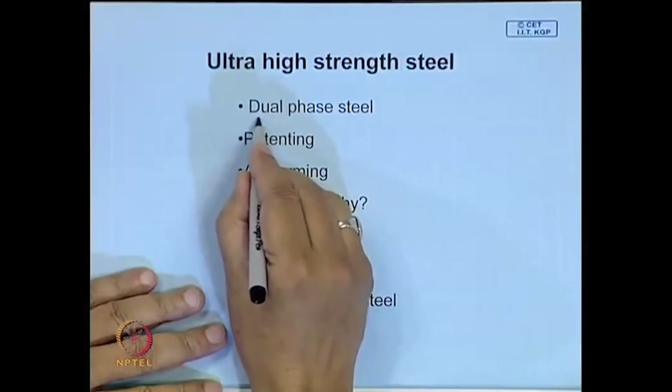We will talk about dual phase steel, we will talk about a special process called patenting, we will talk about ausforming, and in many of these cases it is possible to attain a very high level of strength even in plain carbon steel. Now, the question then comes up, why do we then go for alloy steel and unnecessarily increase the cost, because most of the alloy additions which are made are quite expensive. We will know why we go for alloy steel.

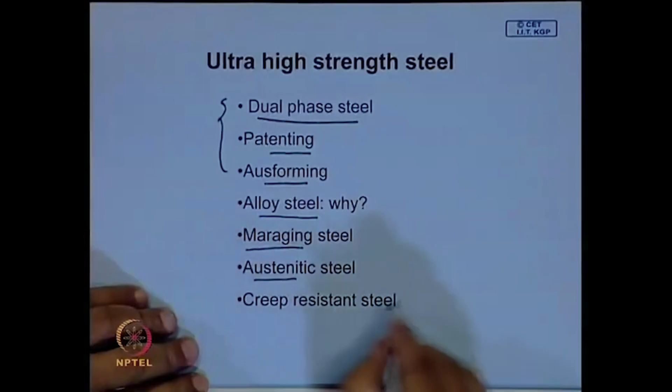We will talk about two different classes of alloy steels which have very high strength and some very interesting properties. We will talk about Maraging steel, and austenitic stainless steel. Primarily we will talk about its stainless property, and also we will know how our understanding of the principles of physical metallurgy has made it possible to develop the type of steels, creep resistant steel, which are being used in several high temperature components.

Now, let us talk about this dual phase steel. In a dual phase steel, what we do is a normal heat treatment process. We heat, suppose this is the composition of steel, this is the part of the iron carbon diagram, this is austenite, this is the ferrite plus cementite region. So the normal structure is something like this.

Of this particular composition, you will have pearlitic regions and you will have ferrites, these are ferrite grains. So it is made up of two distinct regions: these are the primary ferrite and this is pearlite.

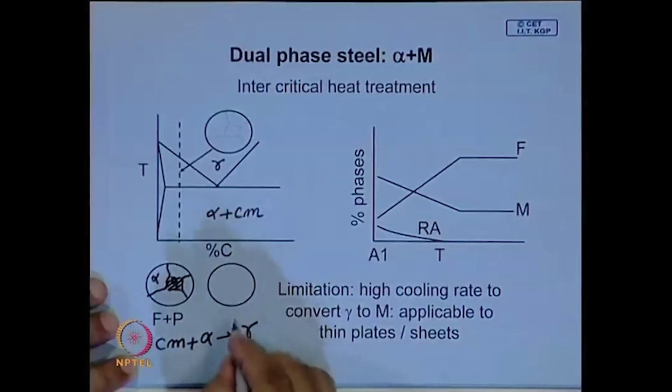Now, when you heat it above this temperature, what happens? The pearlite, the cementite dissolves in the neighboring ferrite, reacts with it, and gives you austenite. This reaction takes place at these interfaces, and gradually the entire pearlite is converted into austenite.

So what you have now here will be alpha, that means ferrite plus austenite. So it is a duplex structure. You can also see the composition: this point will be giving the composition of ferrite, and this point will give you the composition of austenite.

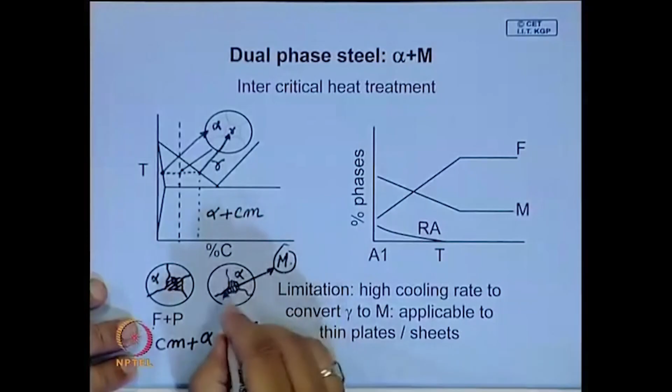Now, what will happen? Suppose you quench from here, then the ferrite parts will remain unchanged, but the austenite part will convert into martensite, and then instead of a ferrite pearlite structure, you will get ferrite martensite. This martensite, since its carbon content is high, will have very high hardness. So you have a composite material sort of thing, a duplex structure.

This is the advantage of this intercritical heat treatment, and it can be implemented in mass production as well. Depending on the temperature at which this intercritical heat treatment is given, you will have different amounts of martensite. If you go higher, beyond this point, ferrite will be almost zero. So beyond this, it will be totally austenite, and if you quench, part of it will convert into martensite and part will form ferrite.

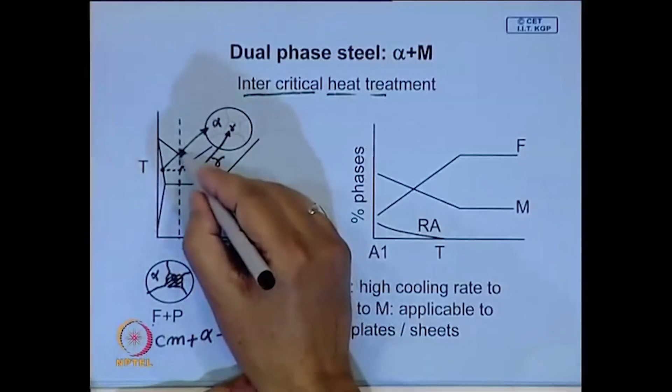So if you quench directly from here, because it is a low carbon steel with low hardenability, even if you quench it very fast, you may not get a completely martensitic structure. So this is the critical point, this is A3. So if you go above A3, then there is not much change.

You have a very small amount of martensite, and it may have mostly ferrite. This is the percentage phase. Whereas, if your intercritical heat treatment is given here, then you are likely to have somewhere here that amount of austenite, proportional to this region, this line.

Amount of ferrite is this, but this martensite amount will be that equilibrium amount, and as you go up, that amount of martensite will change. Also, this martensite will have a much higher carbon content, so its MS temperature is likely to be lower, and MF will certainly be lower than room temperature.

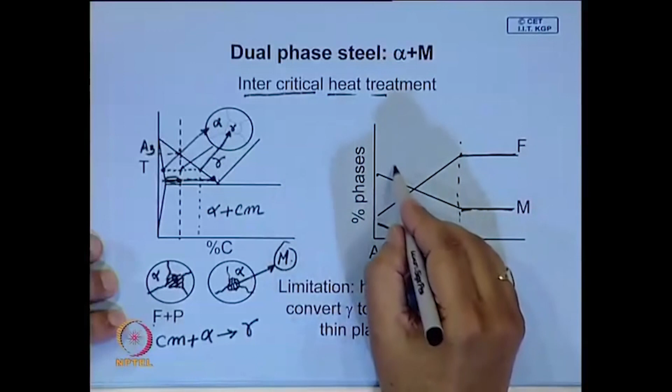So, even if you quench, you are likely to get some amount of retained austenite, and this will go on decreasing. So your total structure, if this is the intercritical heat treatment temperature, will consist of ferrite, martensite plus retained austenite, and as you increase the temperature, the amount of retained austenite goes on decreasing, and here you will get ferrite and martensite.

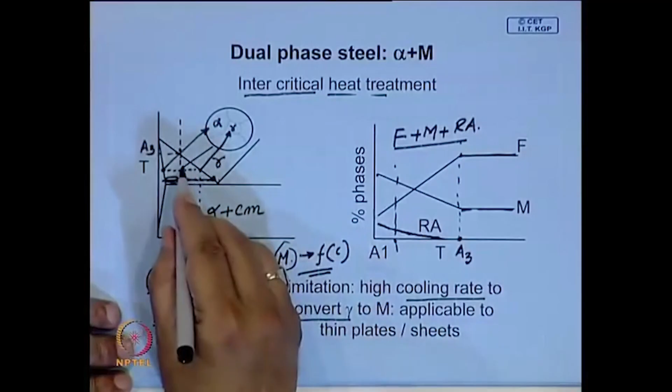But the advantage of having a duplex structure somewhere in between is there is a possibility you will get a stronger martensite, because strength of martensite is a function of carbon content. So it is likely to have much higher strength, but the limitation of this dual phase is the high cooling rate required to convert that austenite to martensite in plain carbon steel, and it is applicable to thin plates and sheets. So the size limitation stays.

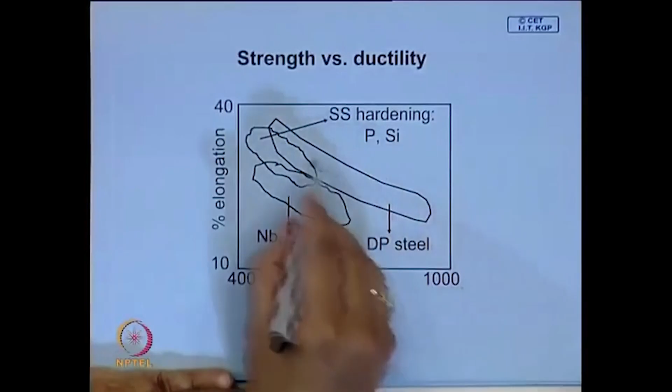Now, what is most attractive about dual phase steel is this gives a better combination of strength and toughness, because in many applications strength may not be enough, it must have a very high degree of ductility. Look at this region which is the dual phase steel, and how does it compare with conventional steel?

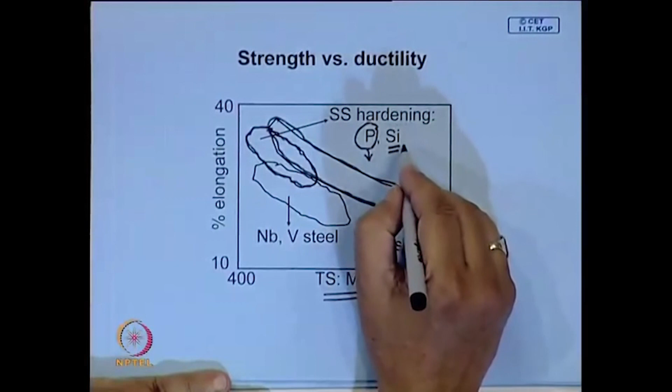Conventional steel's main strengthening mechanism is solid solution strengthening, and phosphorus, as a solid solution strengthener, has a very high degree of effectiveness - a little phosphorus can significantly increase the strength, but it segregates and makes the steel brittle, so these are the problems. Silicon is a common solid solution strengthener. Manganese also improves strength, but it is not as strong as phosphorus or silicon.

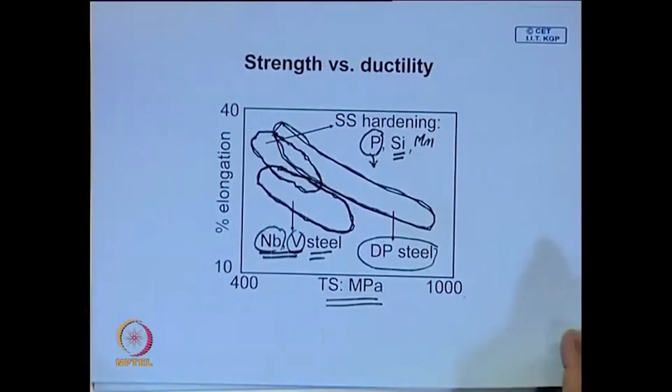Grain refining is the key strengthening mechanism in case of microalloyed steels, so grain refinement we looked at it critically - niobium and vanadium carbides and nitrides are the key constituents which inhibit austenitic grain growth, and you get a very fine structure. So, compared to all this, dual phase steel has a better combination of strength and toughness, and it also has good formability. That is why there is a special attraction for dual phase steel.

Next, let us consider a special heat treatment process called patenting. This is an isothermal heat treatment process, and it gives very high strength steel wire. This is used to produce high strength steel wire.

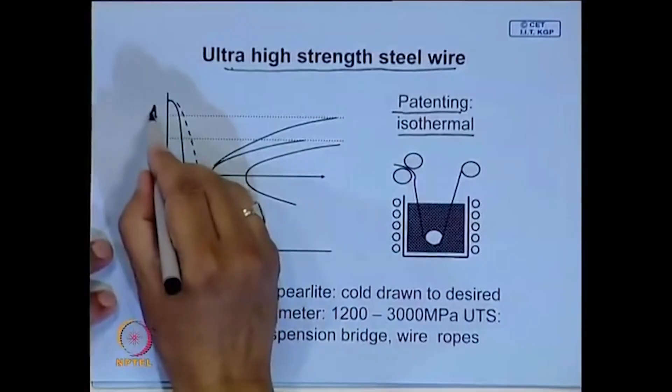If we look at the time temperature transformation diagram of steel, this is the A3 temperature, this is A1, and here you have ferrite plus austenite, this side is austenite. What we tend to do is cool the steel from above, from the austenitic region. When it is austenite, you cool it almost to the nose here.

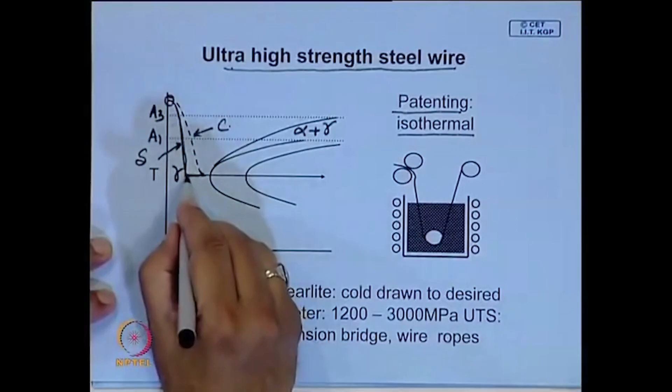This is the temperature of the surface which will cool fast, this will cool slowly, and this is surface, this is the core, and you maintain it in a bath, a liquid bath consisting mostly of lead. If you have a liquid metal bath, this allows the temperature to become uniform and allows transformation to complete at the same temperature, and what we are trying to get is fine pearlite.

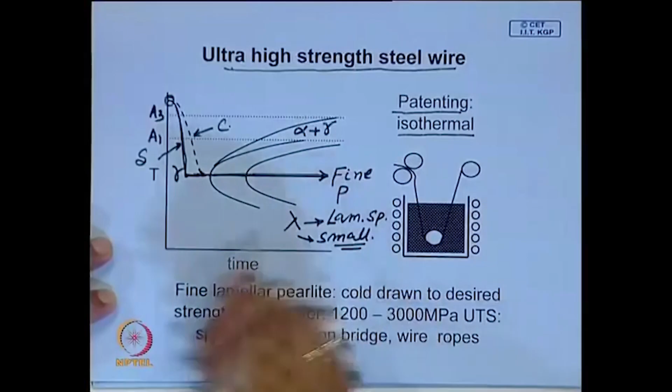Fine pearlite means the lamellar spacing, lambda, is very small, and under an optical microscope the pearlite will not resolve. In normal pearlite you do see this kind of lamellar structure, but the main idea is if you look at it in a standard optical microscope, you will find that most of these pearlite nodules are not resolvable. And how is it done?

So, these are some guide rolls, and this is an idle guide. This is a lead bath, molten lead, and this passes through here.

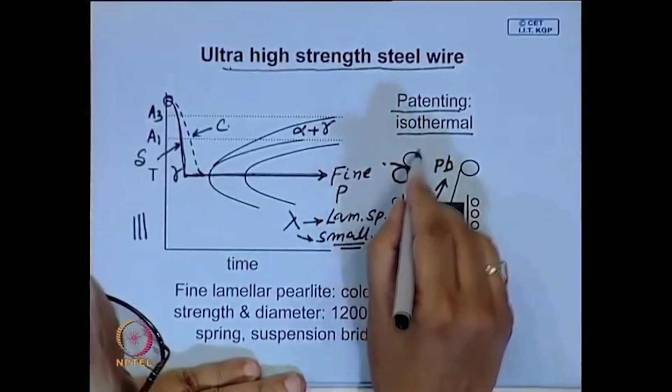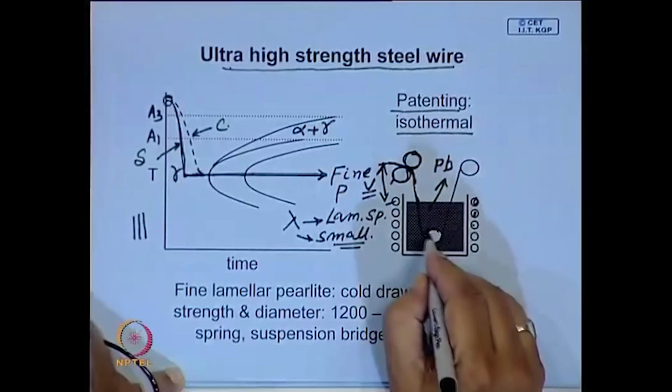You may straighten this in a roll, and sometimes you can heat it also. You can apply some voltage between this and this, and this is a lead bath, and these are heating coils. This can be set up easily in the laboratory, and you can apply some voltage, and then the wire gets heated up, and this temperature is above A3. It comes into the lead bath, and this is just a guide idle roll, and this wire comes out and it coils here.

By this treatment it is possible to get extremely fine lamellar pearlite, and they have excellent drawing property that they can be cold drawn to desired strength and diameter, and you can get a strength of the order of GPa, gigapascal strength. These are used for very high strength applications like springs, suspension bridges, high tensile wire ropes, and strength will increase definitely as the percentage carbon goes up.

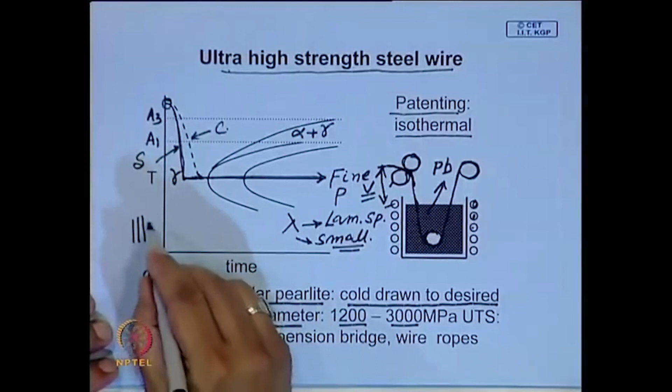In fact, this lamellar structure, when you give such high cold working, say maybe 90% cold work, these lamellar spacings become even smaller. With the transmission electron microscope, people have seen they come out to be of nanoscale dimensions, the spacings, as a result of such large deformations, and that is responsible for such a high level of strength.

Now, let us look at another special forming process called ausforming.

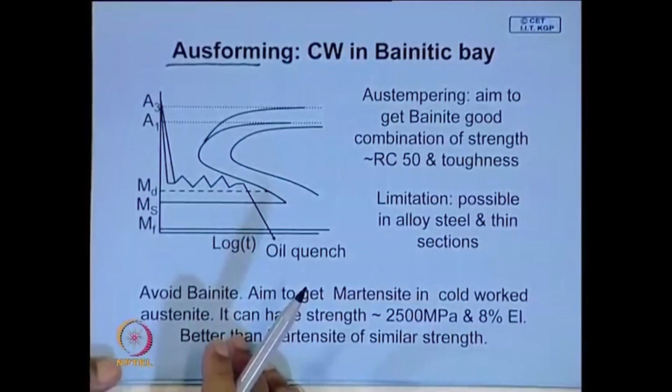In microalloyed steel, what we found out is if you work austenite at a lower temperature, that austenite will not recrystallize, and these austenite grains, if you deform in one direction, these grains become highly elongated. So at least in this one direction they become extremely small dimensions, and they do not recrystallize.

So they will also have high dislocation density. So rho will be high, dislocation density is high.

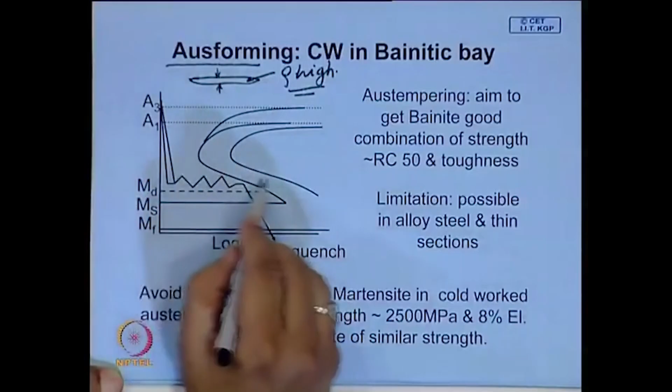Now, if you cool austenite to a region, we have seen most steels have a bainitic bay. If you are able to cool at this temperature - this is the core temperature and this is the surface temperature - when you cool here and then you give working at this region, and here your hold time is sufficiently long, but you make sure you do not go too close to Ms. So in fact, this working has to be done at a temperature higher than the MD temperature. This means that if you work, then the martensitic start temperature goes up - this is the martensitic temperature for a certain percentage of deformation.

So do this: give cold working above MD, and after the cold working is over and before bainite starts forming, you quench the steel. After this, it is necessary to give some tempering, maybe at 100 degrees centigrade, to relieve internal stresses. But the key thing is you avoid bainite and you get martensite in cold worked austenite.

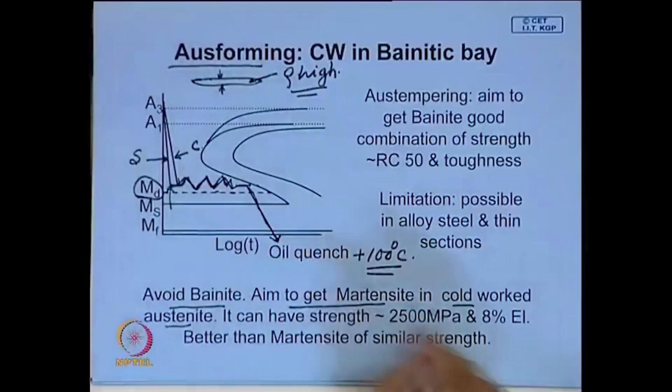So austenite is also very hard, and within that you also get finer, much finer martensite, and this dislocation density will be much higher. Here you can attain a strength level that is quite high, yet you will have sufficient ductility, which is not possible in martensite of similar strength.

We will see that although this type of heat treatment can be given in plain carbon steel, often it is not so easy to do so because of section size limitation. But if you go for alloy steel, possibly you can go to a higher... in alloy steel, possibly that section size limitation may not be that critical, and we will look into that.

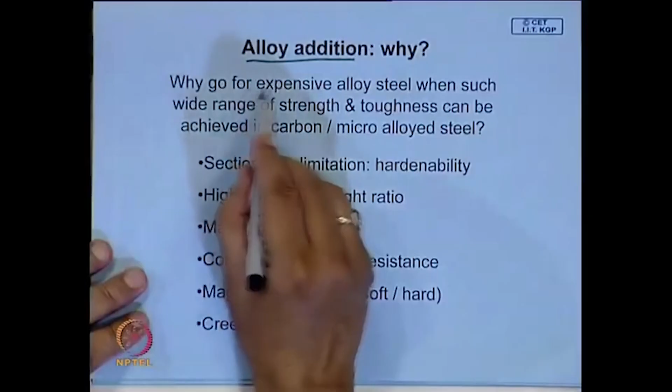Now let us look at why we need alloy addition. The question is, why go for such expensive alloy additions when such a wide range of strength and toughness can be achieved in carbon and microalloyed steel? Is it really necessary? Because alloy additions always make steel expensive.

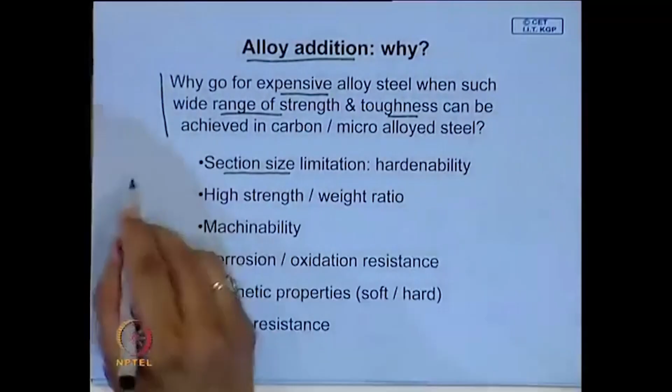Now the major limitation is that plain carbon steel has poor hardenability, and you have section size limitation. Say plain carbon steel, even in the case of infinite quenching - extremely high rate of quenching, ideal quenching - you may be able to get through-thickness hardness, that means 50% martensite at the core, up to, let us say, depending on carbon content, maybe up to 10 millimeters. So for many applications this is too small.

Say, suppose one application that comes to my mind right now is the landing gear of an aircraft. This is a part of the aircraft, it has to fly. So obviously your aim will be to use very high strength material, so that the strength to weight ratio is high, so that the structure is light and it can fly. And in this case, this dimension may be of the order of 80 millimeter diameter.

So imagine, it will be impossible. We know that the best property you can get in steel is through hardening and tempering - tempered martensite gives you the best combination of strength and toughness, and this steel must have high strength as well as toughness. So there is no way you can achieve this for such a large size.

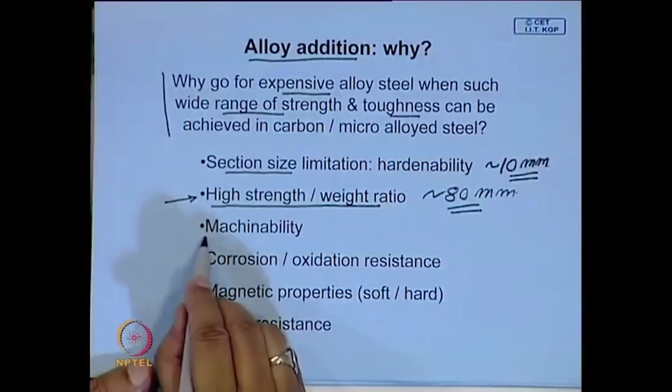So here alloy addition becomes a must. Sometimes to get certain very specific properties, many applications like nuts and bolts require machining, so the material should be machinable. For normal steels, machinability can be improved significantly not only by heat treatment - if you have globular cementite, machinability is higher - but most bulk steels which go for nuts and bolts may not have a high amount of carbide.

So there, machinability is improved by adding some inclusions. Particularly, to take care of sulfur we add manganese and form manganese sulphide inclusions. In fact, for machinable steel, sulfur is intentionally added along with a little more manganese to take care of it, and the presence of these manganese sulphide inclusions gives the steel good machinable property. So this means not only hardenability limitations, but also to give certain very specific properties you need to add some alloy elements.

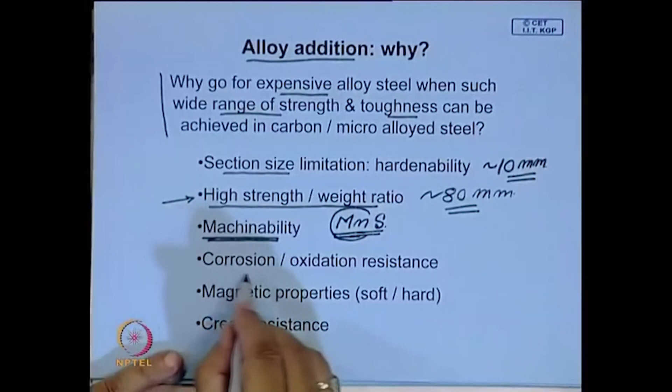Another important property is corrosion and oxidation resistance. Steel rusts. To protect it from rusting, we use many other techniques as well, like coatings - you galvanize the steel to protect it. For most sheet applications, you galvanize steel to protect it from rusting, but in many cases this may not work, so you may need to improve its corrosion resistance. To improve corrosion resistance, you add certain alloying elements, and one of the most common is chromium.

If chromium is present in dissolved form greater than around 12%, say 12.7% to be specific - if it is more than 12% chromium - then the steel has a thin protective coating of oxide which makes the steel stainless. So all stainless steel will have a minimum of 12% chromium, and this chromium must be present in solid solution.

Similarly, for magnetic properties - many applications use steel for its magnetic property. It is magnetic below the Curie temperature, and one of the main applications is the transformer core. When it converts voltage from low to high or high to low, the transformer core gets heated, and this is known as hysteresis loss.

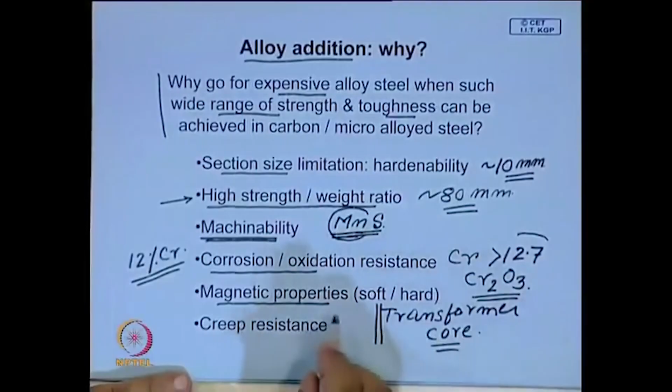To cut down the hysteresis loss, often in steel we use some special alloy elements, particularly silicon. Some steels also add phosphorus - these are electrical grade steels. So you need to get certain specific properties. Similarly, to get hard magnetic property - the transformer core is a soft magnetic material - for hard magnetic property, other special elements need to be added. So this means alloy additions are necessary to improve certain specific properties.

Another major application of steel is in power plants - steam power plants, boilers - where the steel has to be used at temperatures above, say, 450 degree centigrade. In this case, creep becomes one of the important failure mechanisms. So in this particular case also, you need some alloy addition which gives it better corrosion resistance and better creep resistance.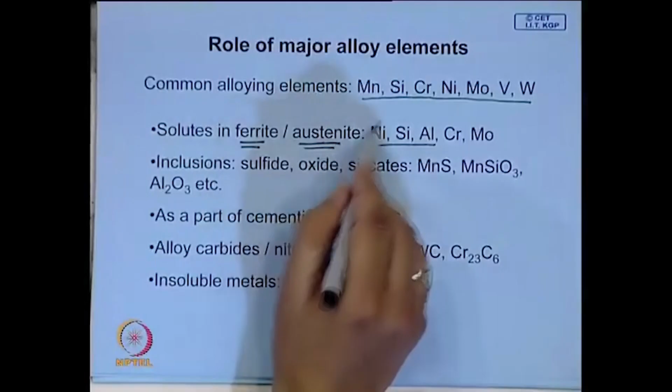Now, when you add alloy elements to steel, where does it go and what is the role that they play? I think this will vary from element to element. Here are some common elements present in steel - this list is by no means comprehensive, there can be several others also possible, but these are the major alloy elements. Bulk of the steel that we use is ferritic steel, and many of these alloy elements are soluble, even if to a limited extent, in ferrite, and in the high temperature phase austenite they also have some degree of solubility.

They will be present as solutes, substitutional solute elements in ferrite and austenite. Some of the elements you add react with impurities present during the steel-making stage. There will be oxygen, it reacts with oxygen to form oxide. There will be some sulfur, it reacts with that sulfur and converts into sulfide, and silicon is also present in steel, some form silicates.

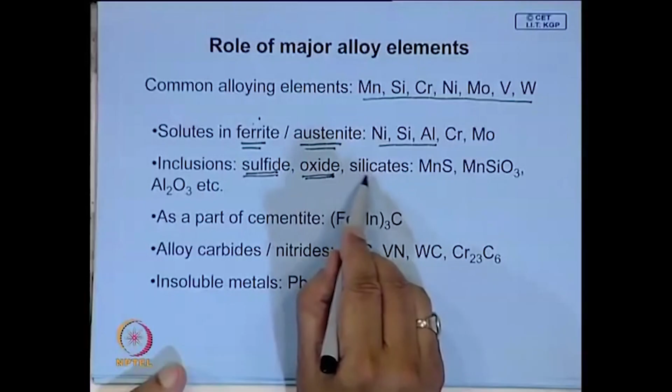Some examples are manganese sulfide, manganese silicate, iron silicate. These are possibilities, you can also have oxides. Aluminum we have seen is used as a deoxidizing agent and it gives fine grain steel.

Alumina is also an inclusion, and some of these inclusions deform easily during hot rolling. Elements like manganese sulfide, if present, get elongated, and presence of these elongated inclusions makes the property directional. Suppose there is an inclusion like this, in the transverse direction it will have lower strength. It will not affect strength along the longitudinal direction, but transverse properties, particularly ductility, get affected. They are also difficult to weld because of these inclusions, they give rise to a defect commonly known as lamellar tearing.

So inclusion control becomes necessary. Shape and size of inclusion control is key to improve properties like weldability or transverse strength, whereas these hard particles are present as globules.

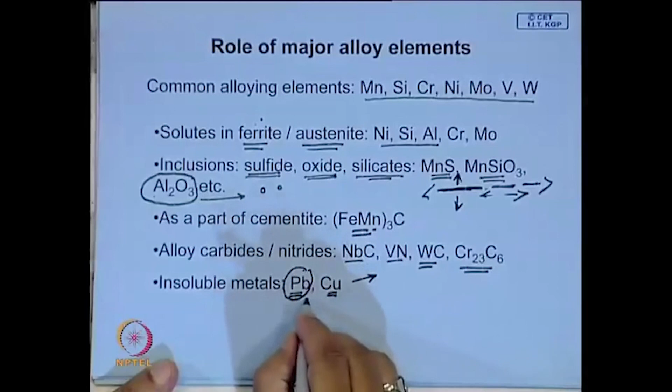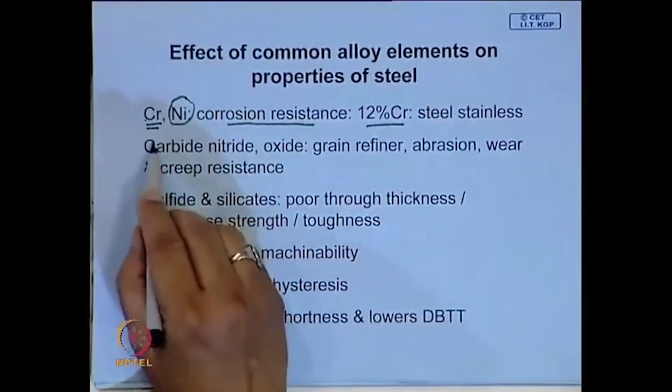Now carbides, nitrides and oxides act as grain refiners. If you have tungsten carbide, that will add to abrasion and wear resistance. Some carbides like chromium carbide or particularly MOC, molybdenum carbide, add to creep resistance. These precipitates, if they form along grain boundaries, actually inhibit grain boundary sliding and improve strength.

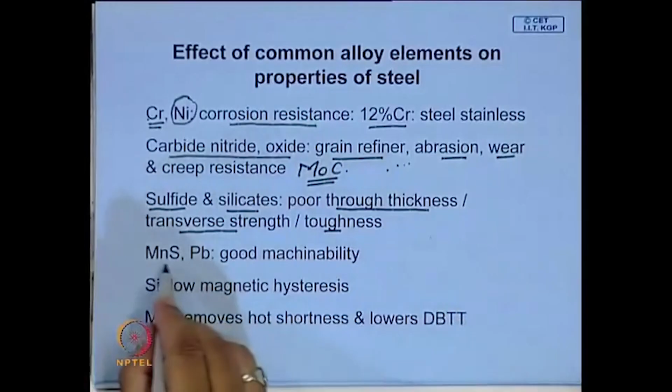Similarly, if you have sulphide or silicates, they give poor through-thickness properties or transverse strength and toughness. It also gives problems with weldability. These inclusions we mentioned give good machinability. Silicon gives low magnetic hysteresis. Addition of manganese removes hot shortness.

We did talk about it, the problem related to sulfur content in steel. Sulfur segregates to grain boundary, and if manganese is not there, it will form with iron a low melting sulphide eutectic, which gives steel poor hot workability, known as hot shortness.

Addition of manganese is extremely important to lower the ductile to brittle transition temperature. All cryogenic grade steels will have a sufficient amount of manganese.

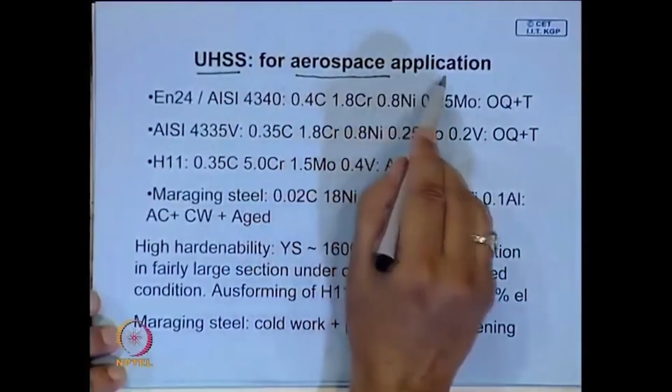Let us look at a few common ultra high strength steels and their potential applications. Obviously, since these have high alloy elements, they are expensive, but nevertheless applications like aerospace, where cost may not be a major limitation, because one major criteria is the structure should be light and it should be able to fly.

So this is the composition. A very popular grade is EN24 or AISI 4340. The composition is 0.4 carbon, 1.8 chromium, 0.8 nickel, 0.25 moly. The moly takes care of many issues in this steel.

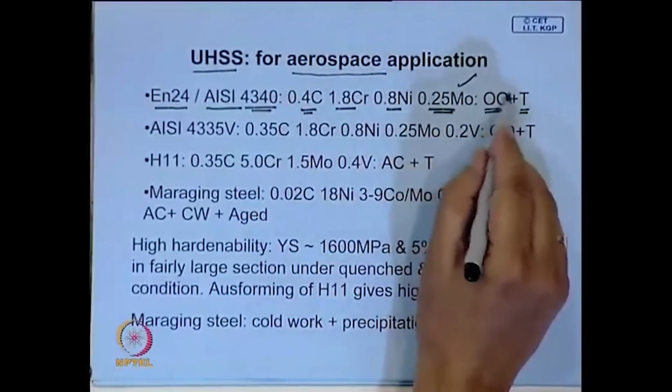When you add these alloy elements, they have a problem of temper brittleness. Addition of moly overcomes that brittleness, and it is used in oil quenched and tempered condition. Because of these alloy additions, it has good hardenability. By oil quenching, you will be able to harden through and through, particularly for landing gear type applications.

This is very useful. There is another grade which is almost based on that. Vanadium addition adds to the strength. Here also the treatment is similar: oil quench and temper, oil quench from that austenitic temperature range, and obviously we look for fine austenite grain. You do not heat it to too high an austenizing temperature.

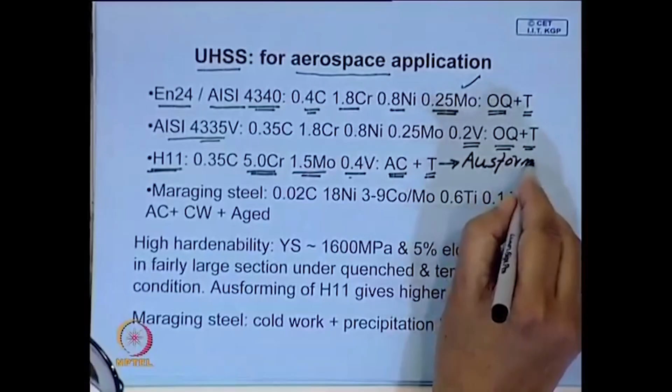Maraging steel has a very low carbon content, but high nickel, and some amount of cobalt, moly, and to get some precipitation you add titanium and aluminum. Main thing is you look at the carbon content. Martensite is hard because of carbon, and if you reduce carbon to this level, the martensite will be soft. This martensite can be cold worked, so it may not have that high hardness. It is aging - these elements develop coherent precipitates in the matrix, and because of the formation of these fine precipitates, its strength goes up.

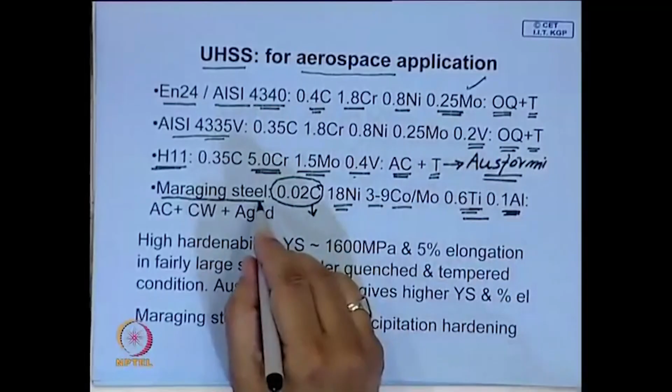Now all of these steels have high alloy elements, so they have high hardenability, and you can always get strength of the order of GPa with 5% elongation in fairly large sections. As mentioned, this is amenable to ausforming, and you can get even higher yield strength and ductility.

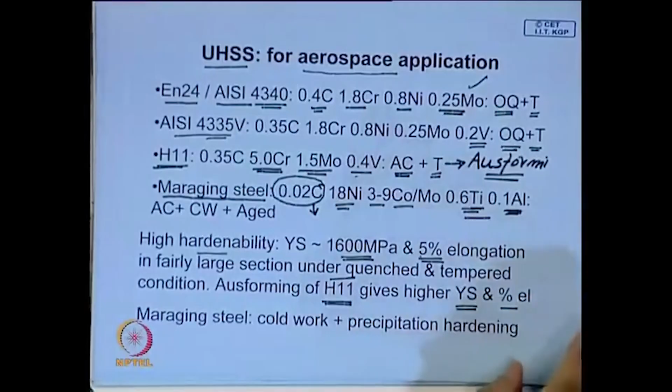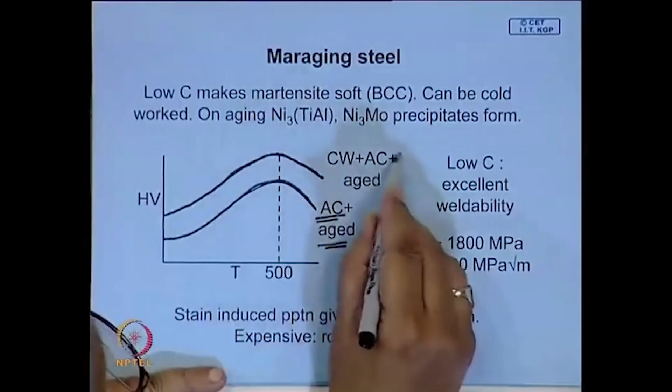Maraging steel martensite is soft, it can be cold worked, and then given precipitation hardening heat treatment. When you give this hardening aging treatment, the hardness goes up. If you do not give any cold work, the hardness increases this way - that's air cooled plus aged. Whereas if you cold work and then age, in the cold worked martensite when precipitates form, it gives much higher levels of strength, and these are the precipitates that form on aging.

Because of low carbon content, maraging steel has excellent weldability. We will see later that carbon is the main alloy element which is detrimental, which makes steel difficult to weld. So for good weldable quality steel, attempt is always made to bring down the carbon content.

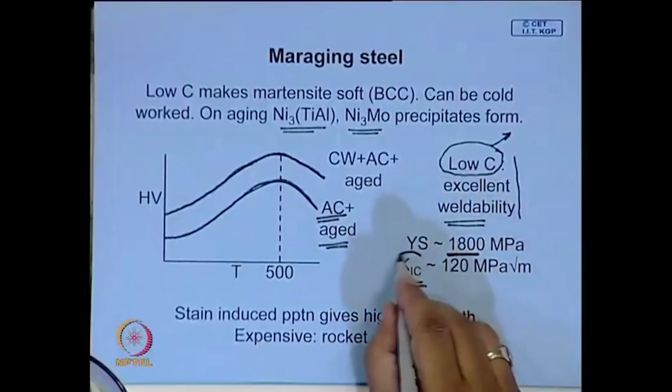Here the strength is extremely high, and it also has very high fracture toughness. We did talk about K1C, which is a measure of fracture toughness. Such a high level of fracture toughness, 120 MPa root meter, and at 1800 MPa strength is unheard of. So this is a very special grade of steel.

Here you have strain induced precipitation, which is responsible for its high strength. This is no doubt expensive - you have 18% nickel, and nickel is the most expensive amongst the common alloy elements which are added. But it is a unique material for rocket casing and aerospace applications.

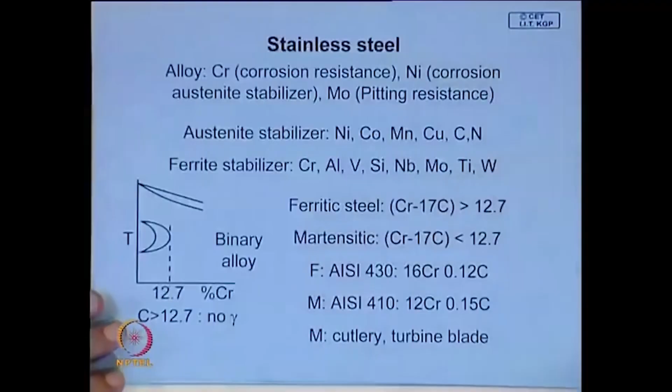Now let us talk a bit about stainless steel. We have seen the main alloy element which gives stainless steel its property is chromium. You must have at least 12% chromium to form a protective coating of chromium oxide. Along with that, we also add nickel to improve corrosion resistance. It is also an austenite stabilizer. We will see that with a certain amount of nickel, the steel becomes austenitic. We also add moly to give it pitting resistance.

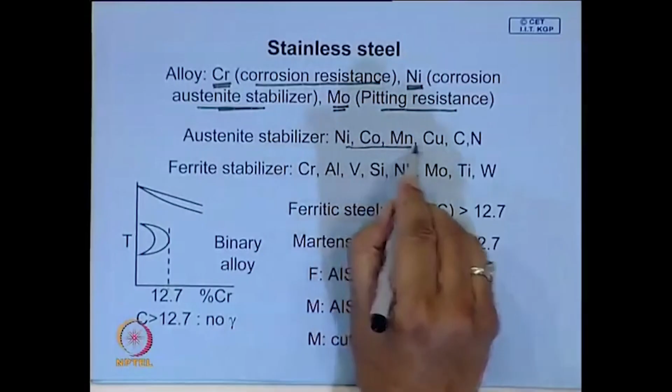Now some of the common austenite stabilizers are listed here - even carbon, and nitrogen - they are also good austenite stabilizers.

Now a quick look at this ferritic steel, the iron-chromium binary diagram. Chromium is known as a gamma loop forming element. So here you have ferrite, sometimes we call it alpha or delta, it doesn't matter. This side is ferritic, and if the amount of chromium goes beyond a critical limit, if you heat that iron-chromium alloy, it remains ferritic until it melts.

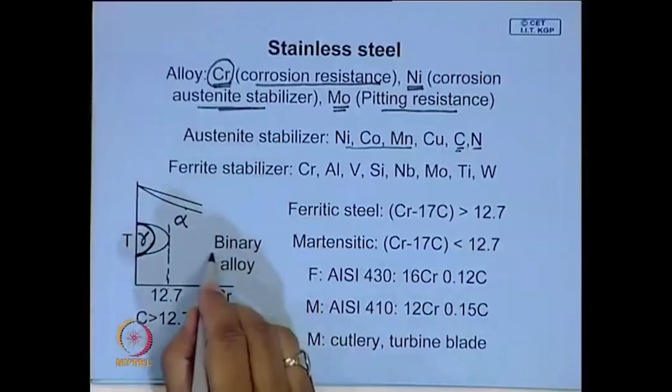So you cannot form austenite. If you have too much chromium, then the steel cannot be hardened or given martensite by quenching - the question of getting martensite does not arise because you are not able to reach the austenitic state. This is an important point to remember. In this binary alloy, the composition is quite important, and this gamma loop is around 13%. So if it is greater than 12.7%, it is ferritic until its melting point.

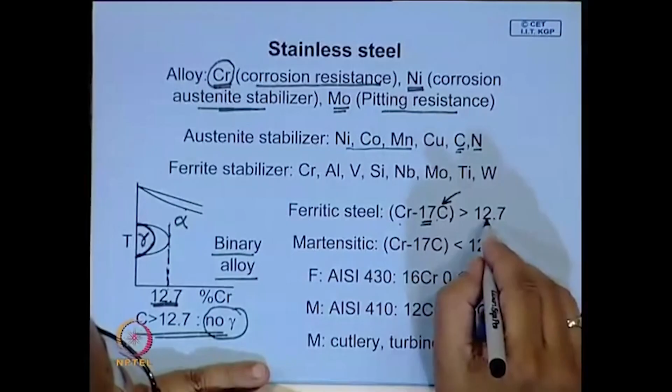So, this is important to remember: if chromium equivalent is greater than 12.7, you have no chance of forming austenite. If you have a stainless steel with carbon, which we have seen is an austenite stabilizer, the effective chromium concentration goes down by a factor of 17 times the carbon content. So, if you have 0.1% carbon, you add 1.7, giving around 13 plus 2, which is 15. So if chromium is greater than this, since normal steel will always have some carbon, around 0.1%, if chromium is greater than 14 or 15, you do not expect austenite to form, and this type of steel is known as ferritic steel. It will be stainless because it has more than 12% chromium in solution.

And if this is less than that, we call the steel a martensitic grade. Common ferritic and martensitic steel compositions are given. One particular composition is 16 chromium, 0.12 carbon. You will find it satisfies this relationship, and this will be ferritic. It cannot be given any hardening treatment. The only way you can harden it is some solid solution strengthening or cold working.

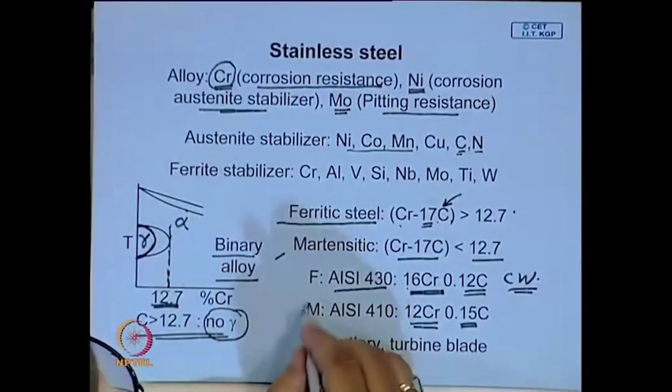Whereas if you have, in this particular case, 12 chrome, 0.15 carbon, this is a martensitic grade stainless steel. It can be heated to the austenitic region, and on quenching you get martensite. This is a steel commonly used for cutlery. Some of the turbine blades in engines are also made up of this type of steel.

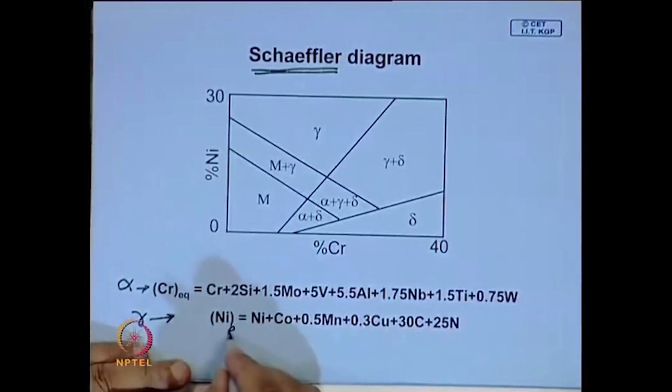Now, to look at what will be the structure of the steel, whether it will be ferritic, martensitic, or in the extreme case austenitic, that is represented very well by a diagram called the Schaeffler diagram. So, all alloy elements can be grouped into two parts: one stabilizes ferrite, another stabilizes austenite. What you can find out is the nickel equivalent or chromium equivalent.

So, they stand for all ferrite stabilizers - these are the factors given here. Some elements are known as very strong ferrite formers, they raise the temperature at which ferrite is stable - look at vanadium, aluminum, they are very strong ferrite formers. Similarly, there are certain other alloy elements like manganese which stabilize austenite. Carbon is a strong austenite stabilizer, and so is nitrogen. So for austenitic grade you try to have a high amount of nickel and some of these austenite stabilizers.

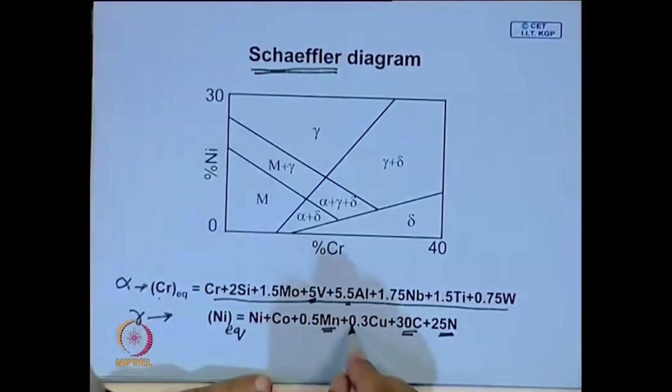And it is possible, if you have this chromium equivalent around here and nickel equivalent here, that from here onwards, in all this region, you will have austenite stable at room temperature. It is very easy to check whether the stainless steel is austenitic or not - check if it is non-magnetic. Alpha iron, ferrite is ferromagnetic, whereas austenite is non-magnetic, it is paramagnetic. So you will find that ferritic steel will be attracted by a magnet, but not austenitic steel. So one of the main applications of austenitic steel is in utensils, and when you buy utensils, often you check whether they are attracted by a magnet.

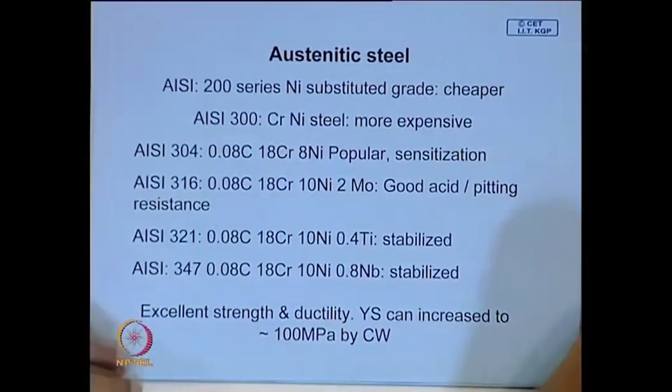Now, we have talked about ferritic and martensitic grades of steel. Now let us look at some austenitic grades of steel. Nickel is a very expensive alloy element, so there have been attempts to have austenitic grades which are cheaper, where nickel is substituted either completely or partially. Common elements used to substitute it are primarily manganese, nitrogen, and copper - these are used to stabilize austenite to room temperature.

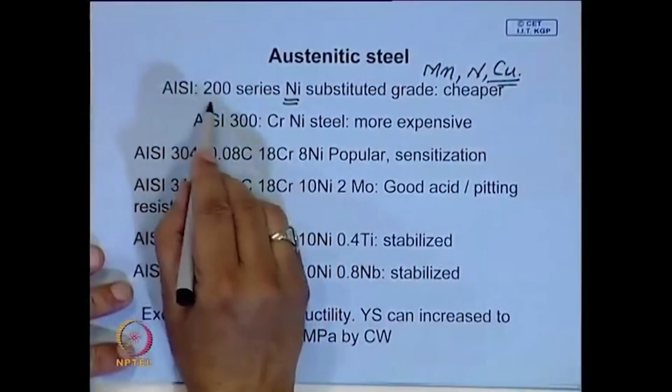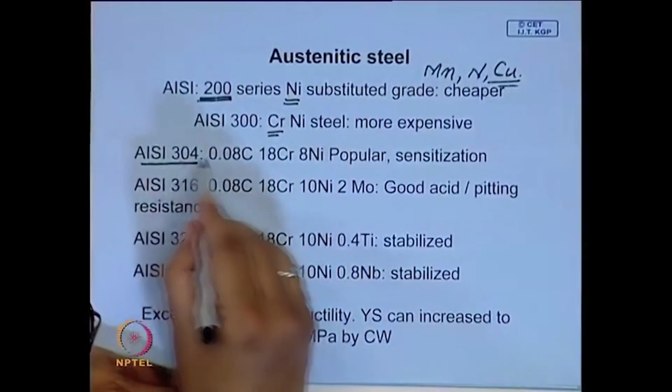But the most common grades, the AISI 200 series, are manganese-substituted austenitic stainless steel. Ferritic and martensitic stainless steel are also stainless, but austenitic steels are definitely stainless because they have a very high amount of chromium. One of the most popular grades is AISI 304 - here you have 18 chromium, 8 nickel, and it has some carbon content. We will see the effect of carbon a little later - this is responsible for a corrosion problem called sensitization. Under this condition, these steels are susceptible to intergranular corrosion.

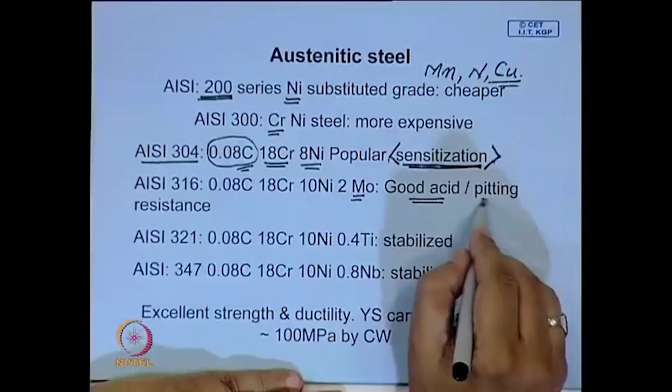To avoid that, often certain alloying elements are added, like molybdenum, which gives better acid resistance or pitting resistance. You also have a little higher amount of nickel to give acid resistance - this is another popular grade, AISI 316. Another is AISI 321, which is called a stabilized grade. We will see later why it's called stabilized - you add a certain amount of a very strong carbide former.

Another popular grade is AISI 347. This contains niobium, a strong carbide former. This is also a stabilized stainless steel.

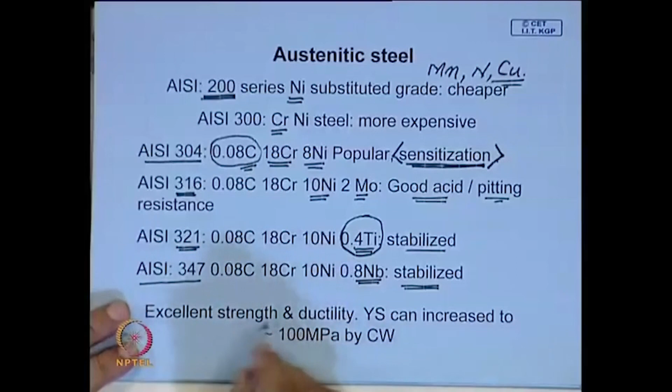Now, the main important property of austenitic stainless steel is it has excellent corrosion and oxidation resistance. It can be used for high temperature applications, and it has not only high strength but good ductility as well. But the main problem is it is not amenable to any heat treatment, like martensitic heat treatment is not possible.

Only way it can be strengthened is by cold work, and yield strength can be increased to around 100 MPa by cold work. By giving cold work, you can increase its strength significantly.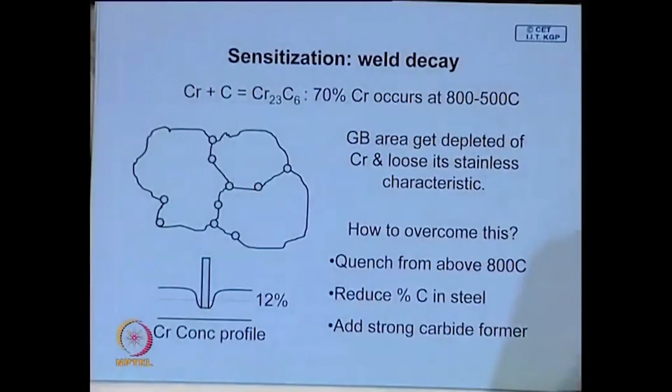Now, let us look at what is sensitization. We mentioned that oxidation or corrosion resistance of steel is derived from chromium, and this chromium, when it is present in solid solution, then only the steel has good corrosion resistance. No matter whether it is austenitic or ferritic, this chromium must be present in solid solution.

Now, the problem that comes up is austenite can dissolve a sufficient amount of carbon as well. So what happens in this austenitic stainless steel is that carbon which is dissolved in austenite, and chromium which is also dissolved in austenite, may react to form carbide, and this happens if by chance the steel is heated to these regions, which is often very common.

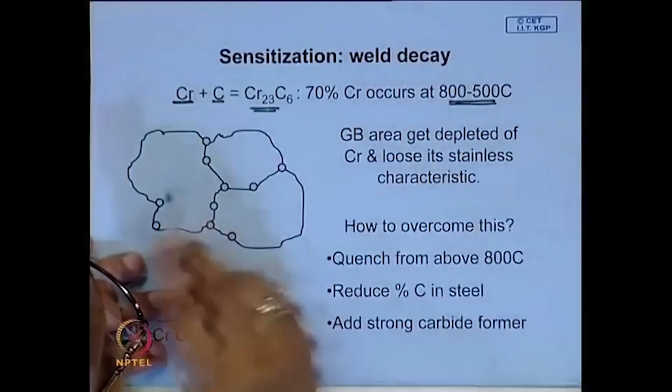If you are trying to weld the steel to make a vessel or something, some of the area will be heated to this region, and then this type of precipitation will occur. When this precipitation occurs, it consumes a significant amount of chromium, around 70% chromium you have in chromium carbide.

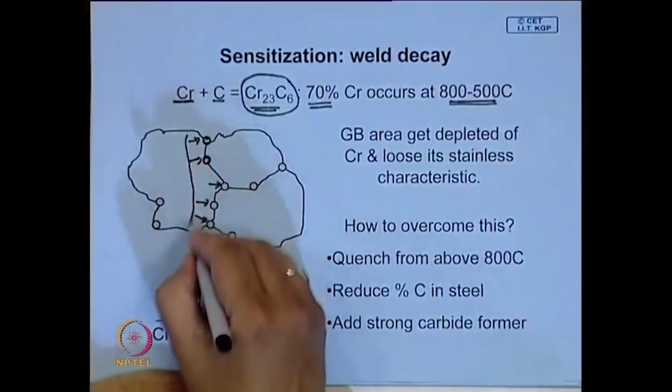Then what happens, if this chromium carbide forms at the grain boundary, the surrounding region, that chromium gets depleted, all this chromium gets depleted and it goes into the precipitate. So you have a region which is depleted of chromium, and this loses stainless or corrosion resistance property.

So therefore, this is where it gets attacked by the environment and it is susceptible to intergranular cracking, and this is the chromium concentration profile that you can think of.

So this is the base, chromium is 12, and suddenly this comes down, and near the precipitate it goes up, here it goes up to 70%.

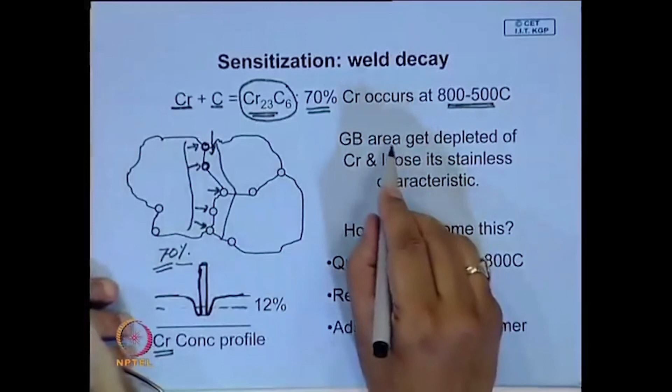Now, the question is, and the main reason for this is the grain boundary area gets depleted of chromium and loses its stainless characteristics. Therefore, grain boundaries are susceptible to attack, and therefore it is susceptible to intergranular cracking.

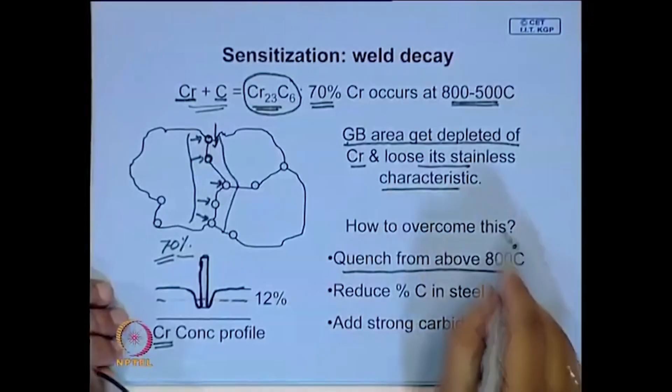And how to overcome this? One way is, if you quench from above 800 degree centigrade, which is not always possible, then you do not get enough time for this reaction to take place, because above that most of this is soluble in the matrix. But this is often not possible. If a material has been sensitized, if you can give this treatment, then that problem will be overcome. Then the other alternative is to reduce carbon.

So there are certain grades like 304L with a very low carbon. In that case, it is possible that it will not be susceptible to this sensitization problem.

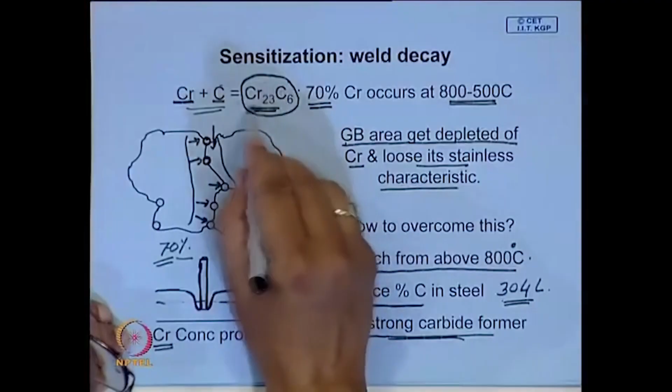Another more common way of avoiding it is to add a strong carbide former like titanium or niobium. Then what happens? This reacts with carbon and forms titanium carbide or niobium carbide, and they have a stronger affinity for carbon than chromium. So therefore, chromium does not get enough carbon to react with, and chromium is forced to remain in solid solution. So these are the very common ways of avoiding the sensitization problem in steel.

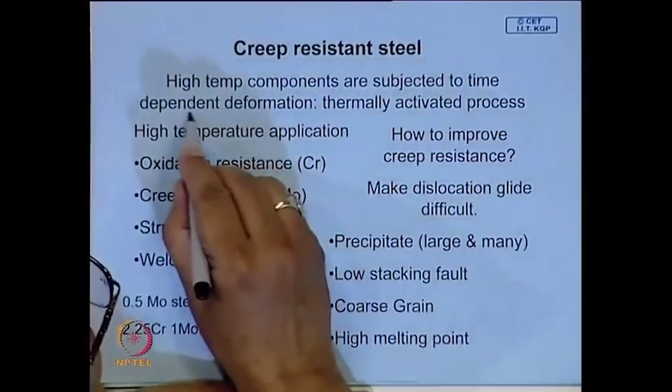Now, a quick look at creep resistant steel. We talked about creep, which is a time dependent deformation, for any component which is used at a high temperature. In that case, there will be time dependent deformation, and this is a thermally activated process. Now, if you are therefore looking for a steel or any alloy which can withstand high temperature or high stress at high temperature, in that case what do you look for?

You look for the material to withstand that environment at that temperature. It must have good oxidation resistance, or it must have good creep resistance. For oxidation resistance, the common alloy element is chromium. For creep resistance, the common alloy element is moly.

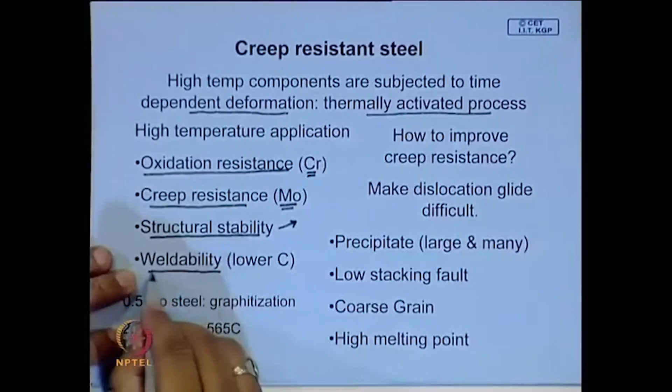Another requirement is structural stability. It should have a very stable structure, and preferably some stable precipitate, and stable precipitates are coherent precipitates. Coherent or semi-coherent precipitates are most stable. So you look for such features in the alloy. Often for creep resistant steel, if you are making a boiler superheater, it must have good weldability, because the main fabrication technique will be welding, and these tubes are welded.

So often there is a limit that it will have lower carbon. Now, the earliest creep resistant steel, used in older power plants which do not operate at very high temperature, maybe around 450 degree centigrade, so there half moly steel is good for creep resistance, but this is known for a problem called graphitization.

With prolonged use at high temperature, carbide gets converted to graphite, so that is a major problem. How to overcome this? This is overcome by adding chromium and a little bit of moly. So 2 and a quarter chrome 1 moly is a very common creep resistant steel, and this is used at 565 degree centigrade.

The main question that comes up is how to improve creep resistance. It is a time dependent deformation, and the main reason for deformation is dislocation glide. If you can make this difficult, how do you do it? You have precipitates, large and many precipitates, needed to make dislocation glide difficult.

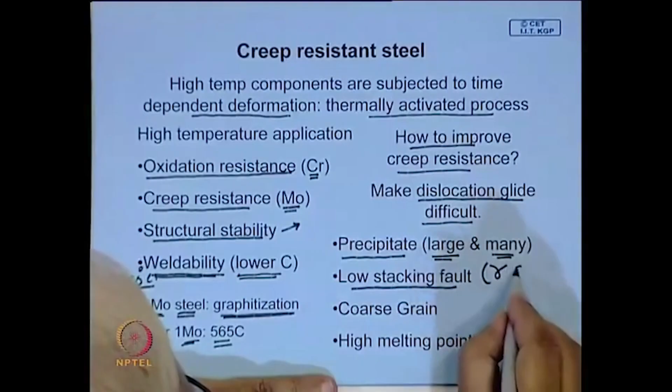Sometimes you can make dislocation movement difficult by lowering stacking fault energy, like austenitic steel. They have low stacking fault energy, so screw dislocation movement will be difficult, it cannot cross slip. Another important factor is coarse grain, and obviously when looking for creep resistant steel working at high temperature, you will definitely be looking for a material which has high melting point.

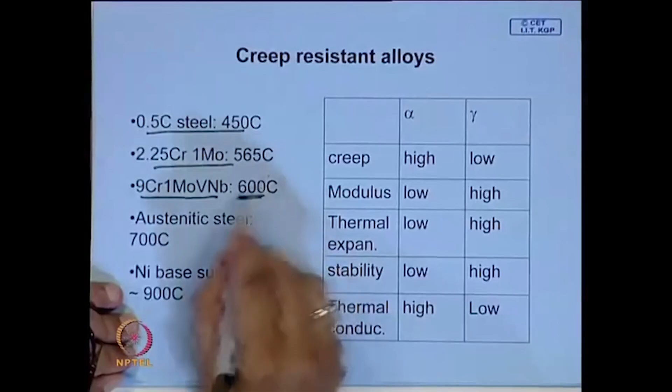These are the common creep resistant alloys listed, and this is a newer grade of steel currently used in supercritical power plants. It can go up to 600 degree centigrade. It has a higher amount of chromium and some amount of strong carbide formers, which give stable carbides, and this forces moly to remain in solid solution to give better creep resistance.

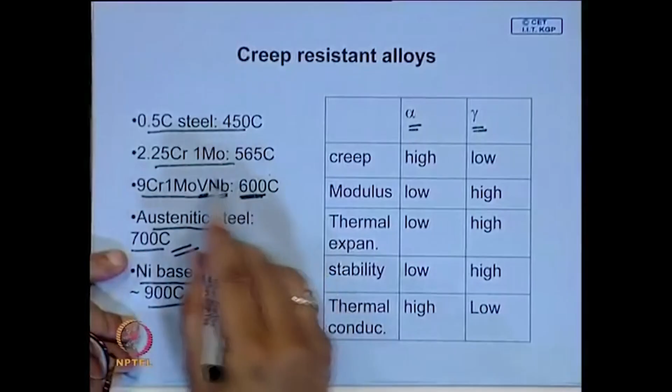Austenitic steels have good creep resistance, and for higher temperature you go for nickel based super alloy. There is often a debate whether ferritic steel or austenitic steel is better for creep resistance. No doubt at higher temperature where phase stability is considered, austenitic steel has no alternative, it has higher temperature capability. But ferritic steel can have its temperature capability improved to 650 degree centigrade, and it has certain advantages like low thermal coefficient of expansion and higher thermal conductivity, which are also quite important.

So with this we stop here. To sum up, what we have covered today is dual phase steel, a special heat treatment called patenting, another heat treatment called ausforming. We talked about alloy steel and why it is necessary to add alloy elements to steel. We talked about a special grade of steel called maraging steel and creep resistant steel. Thank you.